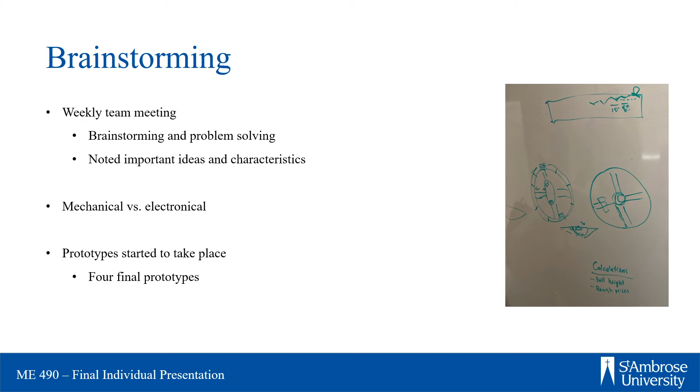Even though we were only brainstorming ideas and characteristics that the wobble board might have, our group found that they could always be lumped into 2 categories: mechanical prototypes versus electronic prototypes, which both had their own pros and cons. For example, electronic components have to have batteries, but mechanical prototypes would be purely mechanical and only have limited feedback. After a few weeks of brainstorming, we had 4 prototypes take shape, and we felt they were at a good point in which our group could present to them at JUMP at our midterm presentation in order to gain feedback on what they thought would work and what they thought wouldn't work to fit the project scope.

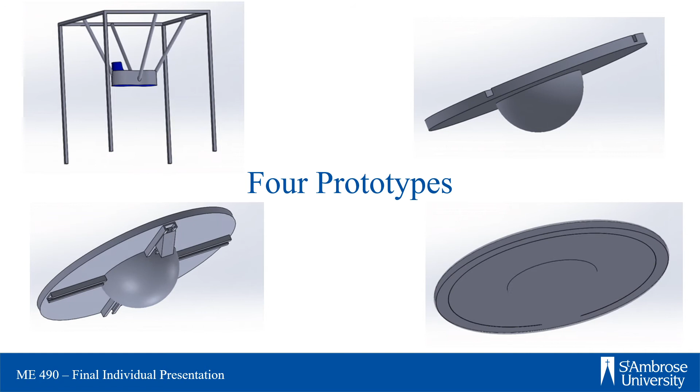Our 4 prototypes consisted of the ankle cradle, which is in the top left, the wedge board, which is the bottom left, the ball game board, which is the top right, and the LED board, which is the bottom right, all of which gave automated feedback and were designed to have minimal drawbacks when used in the field. The first prototype that was presented to JUMP was the ankle cradle. This was unlike our other 3 prototypes because it did not closely resemble the traditional wobble board, but still did the same thing for the user, and that was to increase ankle range of motion and ankle strength.

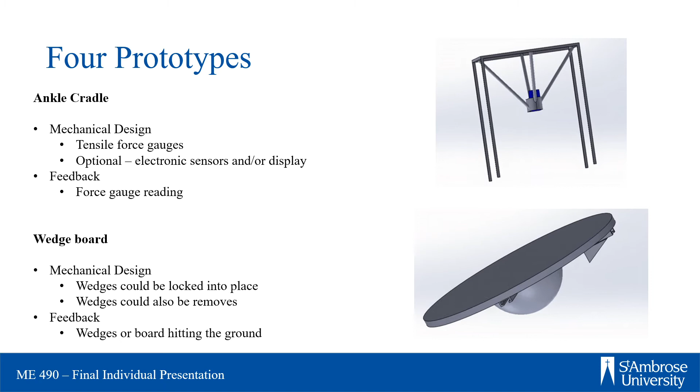The frame would rest on the ground while the user sits or stands and puts one foot in the cradle. But unlike traditional wobble boards, one upside to this design was that it would be harder for the user to hyperextend their ankle by losing control of their range of motion or ankle muscles and going too far in any single direction. The cradle had 4 elastic attachments to the frame, which each had a force gauge attached to it. This would provide feedback to the user and to the physical therapist to show how much force the user is exerting in any direction, therefore giving feedback for progress for the user.

The second prototype was the wedge board, and again, just like the one before this, was a purely mechanical design, just like the ankle cradle. The wedge board resembled the traditional wobble board with one small change, and that was the rails and wedges, which were mounted underneath the board.

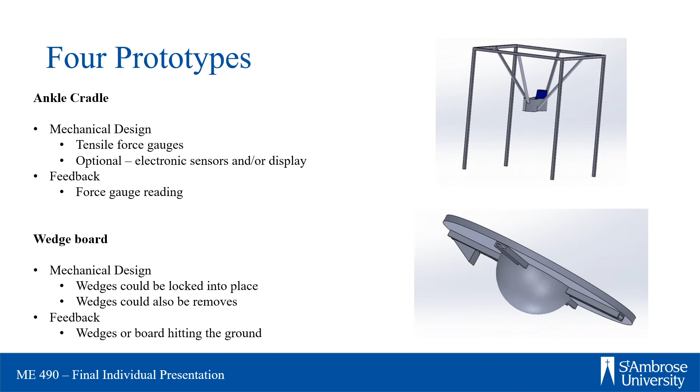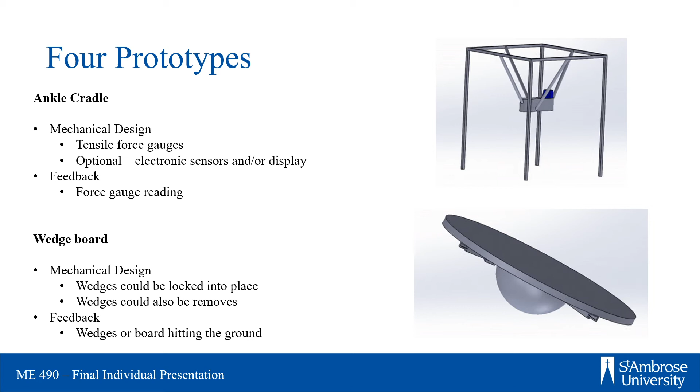These wedges had 2 applications, first of which was to prohibit the user from hyperextending their ankle in any particular direction to prevent unnecessary injury while rehabilitating, just like the ankle cradle. But the second was that the rails would provide different adjustment levels for the wedges, which would allow the board different angles of tilt for different ranges of motion, therefore giving the feedback to the user when the wedge hit the ground, telling them that they hit their range of motion goal.

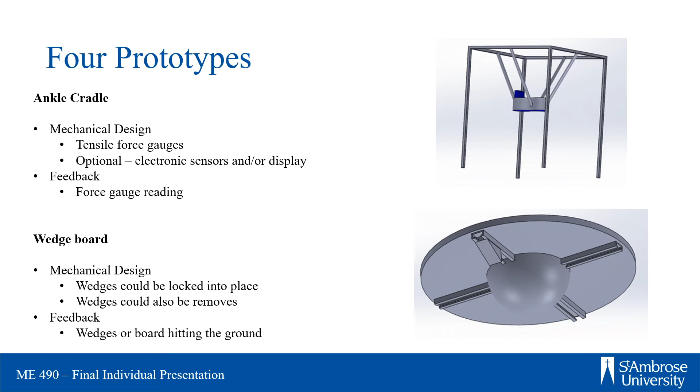The third prototype was the ball game board. This again resembled the traditional wobble board design, but this time there were 4 tracks carved out of the top of the board, in each of their own directions, with a ball sitting in each of the tracks. The purpose of these tracks was actually to give the patient and the physical therapist feedback on how far the board was being tilted in each of the 4 directions.

This would be apparent by having incremental steps, which would correlate to various angles of tilt of the board with that given direction, and the ball was the indicator on how far the board was being tilted in that radial direction.

The last prototype we presented to Jump at our midterm presentation was the LED board, and unlike the other 3 prototypes presented, the LED board was completely electronic. We took the design of the basic wobble board and added a gyroscopic sensor, LEDs, and an Arduino board in order to give the feedback to the user. Our thought process behind this was that there would be a strand around the outside edge of the board. Inside the hemisphere on the bottom of the board would sit the gyroscopic sensor and the Arduino board.

This would sense the angle of tilt of the board and then light up the corresponding LEDs for the direction of tilt. The feedback for this would be the color of each LED light. Different ranges of motion would have different corresponding LED colors. For example, 0 to 10 would be red, 10 to 20 would be yellow, 20 to 30 would be blue, and so on and so forth. This would give the user the feedback instantaneously and would also add some sort of level of gamification to the board so that they could meet their range of motion requirements for that day.

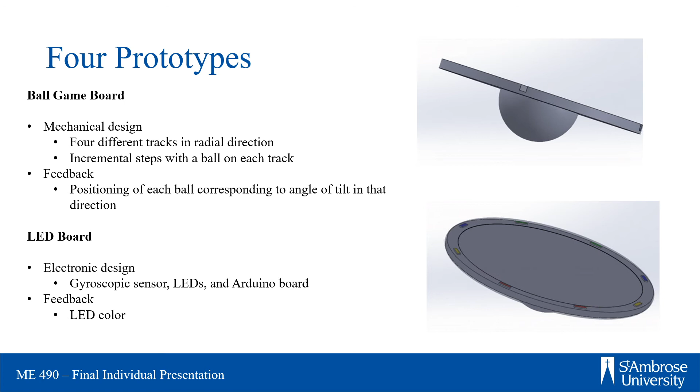The midterm presentation for our group was actually a very big stepping point in finding the direction for the rest of the project. Our presentation quickly turned into an open discussion and brainstorming session with the Jump team, and they got to voice their opinions on what they thought would work and what they thought didn't work. This actually gave our group a lot of very helpful information on what they thought the project should be, and even though we didn't get to meet with the members of Jump on a daily or weekly basis like some teams did, this gave a lot of feedback to us, and our process of the project so far was extremely helpful, and in the long run outlined how the final product would turn out and the rest of the direction of the project would be taken.

On March 12th, St. Ambrose University decided to switch to online learning due to the ongoing COVID-19 outbreak. Due to this decision by the university, it left a big question mark on how our final project would turn out at the end of the semester. Not having university equipment and resources really hindered our progress, but luckily each member quickly found their role on the team with what available resources they did have.

Herb ended up drawing the short end of the straw here because he had a lot of equipment at his house for construction and assembly, and so Herb was also ultimately placed on the task of fabricating and assembling all of the physical products for the final design, as well as a lot of the electronic coding and assembly of electronic portions. Ethan and I assisted Herb as much as we could by having lots of FaceTime meetings with him and trying to brainstorm different ideas to come up with diagrams on how to overcome certain issues.

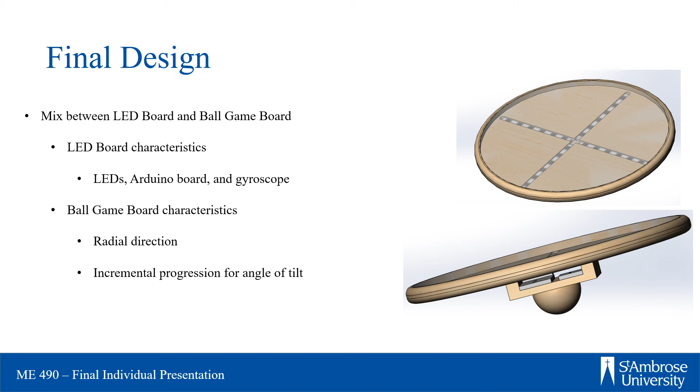Once we knew what characteristics to carry over from the prototypes to our final design, most of the work was actually already done. After some brainstorming and quick fabrication process, the final design would consist of 6 different components. The first of which being the acrylic disc that would sit on top of the board. The purpose of this disc was to allow the user to rest their foot on top of the board without having to worry of damaging LED strips or any other electronic components.

Instead of using individual LEDs, the decision was to get LED strips. These LED strips already came put together and had some layer of protection and only really needed to be cut out to the desired length, and a few minutes of soldering a wire for a ground and a positive wire, which would then be hooked up to the Arduino board, was all that was needed.

The wood disc was mainly just to hold everything together and give the majority of the support to the user. These divots that are carved out in the middle, starting from the center of the disc to the radial direction in 4 different directions, are what the LEDs would sit in, and then another divot would be carved out at a 17-inch diameter so that the acrylic disc would sit on top, protecting the LED strips and all of the wiring.

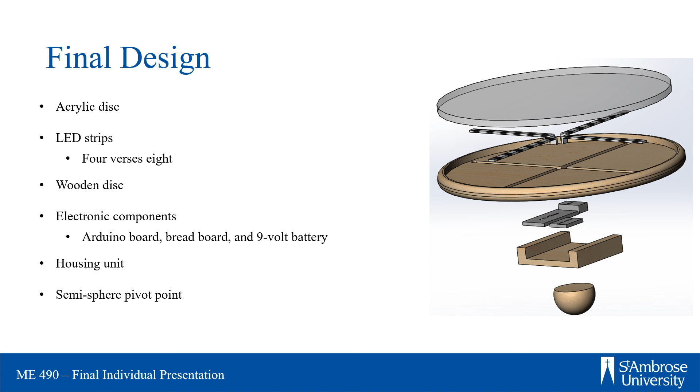Then once the housing unit was attached to the bottom side of the wooden disc, a circle was routed out for the semi-hemisphere to be mounted on the bottom, which was then the pivot point for the board to rotate on. And that was all of the final product, and it was finally ready to be used.

The items that we plan on handing over to Jump consist of the final report, which shows our progression and thought process through the entire decisions made throughout the semester. It also had the bill of materials, which outlines all of the raw materials used in case Jump does decide to reproduce our process in means of distributing the Smart Ankle Trainer to physical therapy offices throughout OSF.

We also would provide the construction manual, which shows them how to construct the Smart Ankle Trainer, and 2 Arduino code files, which would then be uploaded to the Arduino to run and operate the Arduino board, and desired feedback would be given to the user. And then lastly, we plan on somehow shipping the final product that is fully assembled to Jump so that they can test and hopefully use it on site.

A few future design changes that we did not have time to implement would be audio feedback. This would not only allow visual feedback in the system, but would have some sort of noise to be played on the speaker when the user reaches their desired range of motion. This adds another layer of feedback so the user and the physical therapist know exactly what they're doing and how well they're doing it.